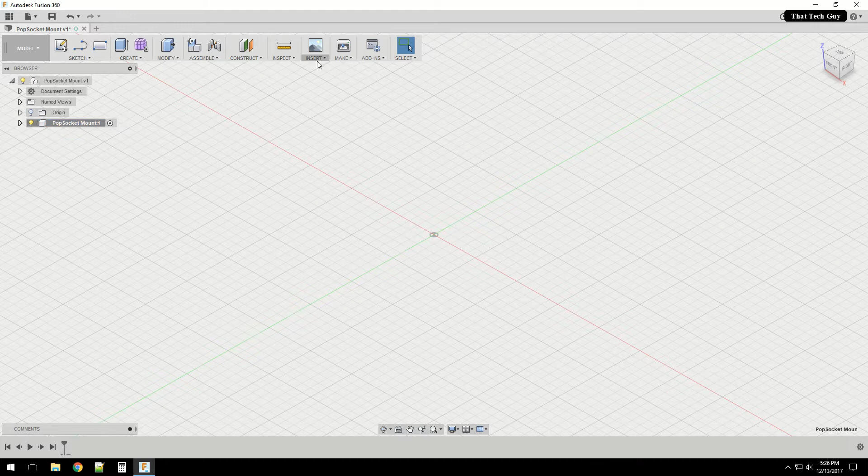All right, first thing we need to do is then set up a canvas, so we're going to attach canvas. This is that picture I took of the PopSocket. I'm going to create on this face, the front face. Click OK, we'll go take a look at it.

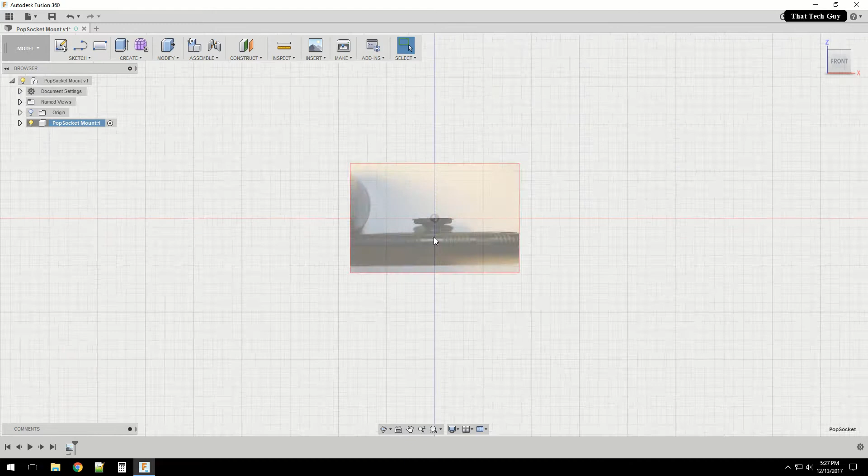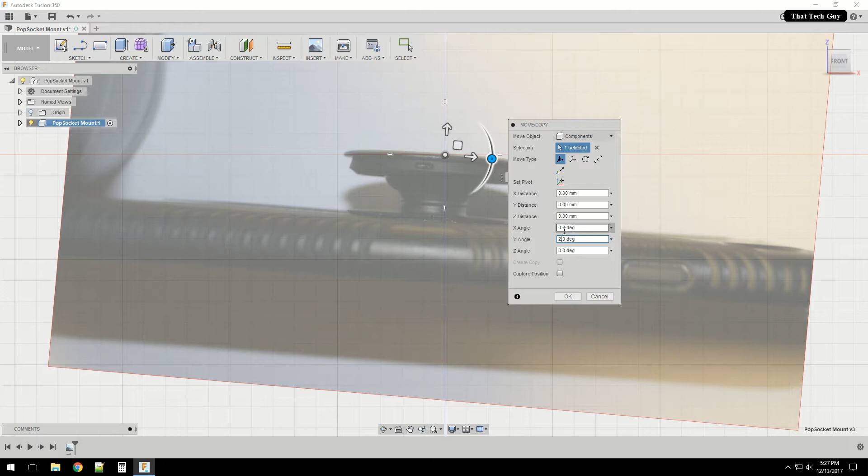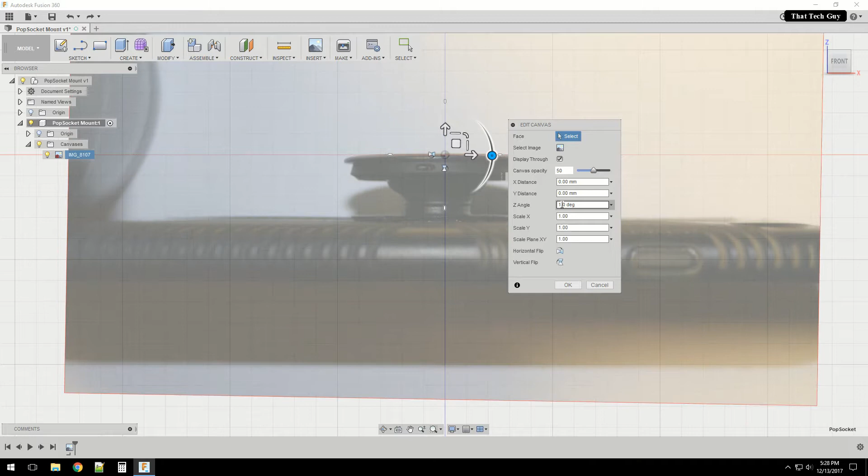First thing I'm going to do is fix the orientation. So let's go ahead and do that first. Let's just see, 5 is too much. Let's try 2. Nope. Let's try 1. That looks good.

And then we're going to calibrate the image so it's the same size as in real life. So I'm going to get my calipers and measure the very top portion from here to here, and I got 39.7.

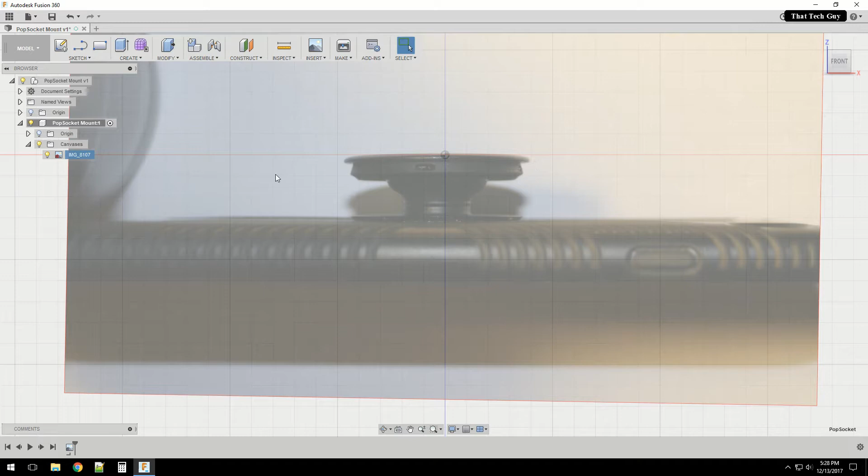What I'll do is right click on it, calibrate, we'll zoom in, from here to here is 39.7. And that basically made that 39.7 in this image.

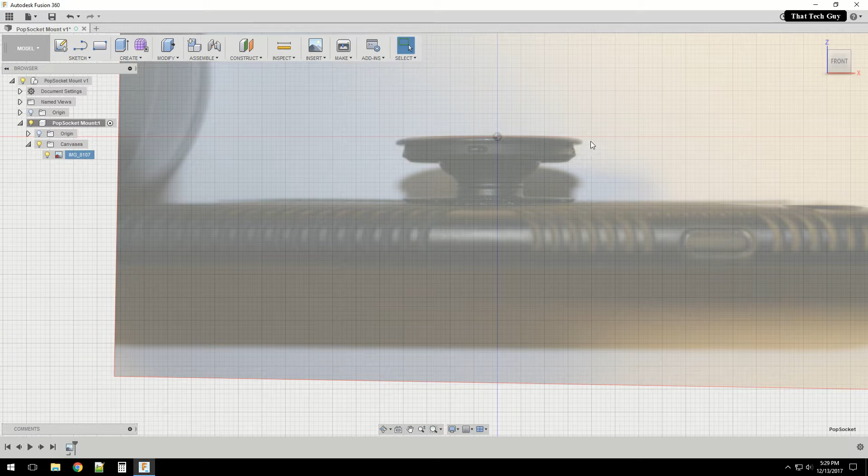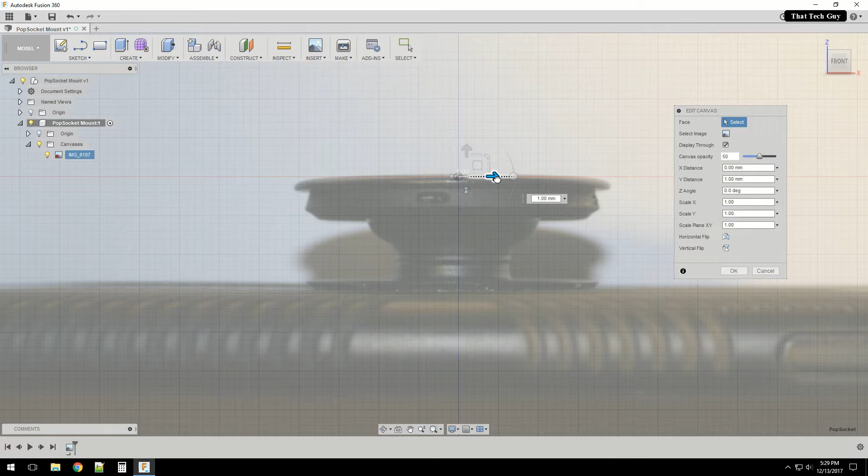So the next thing we're going to do is, now that I have things, it doesn't look perfectly centered, so I'm going to move it again. So I'm going to edit canvas. I'm going to move this out of the way. I think that looks good right there.

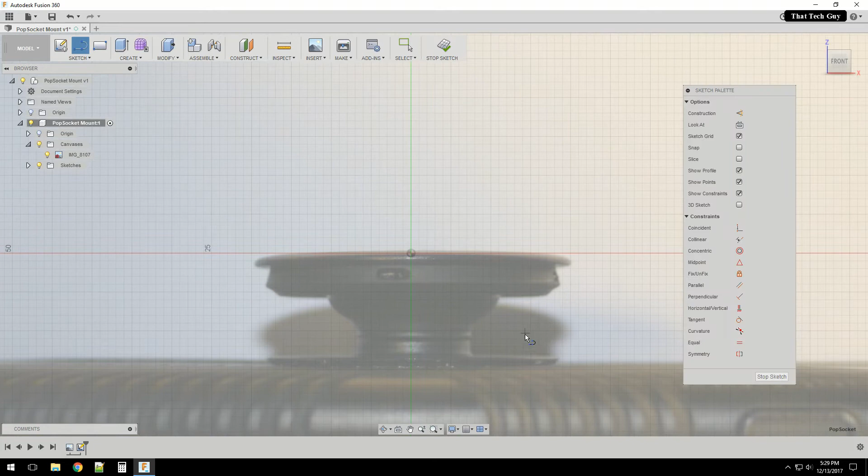So next is I'm going to start drawing a line. I'm going to start right over here on this view. It's asking me what view I needed to put it on, so I went ahead and clicked on that. Then I'm going to start here, here, and then to around here. I'm going to stop there.

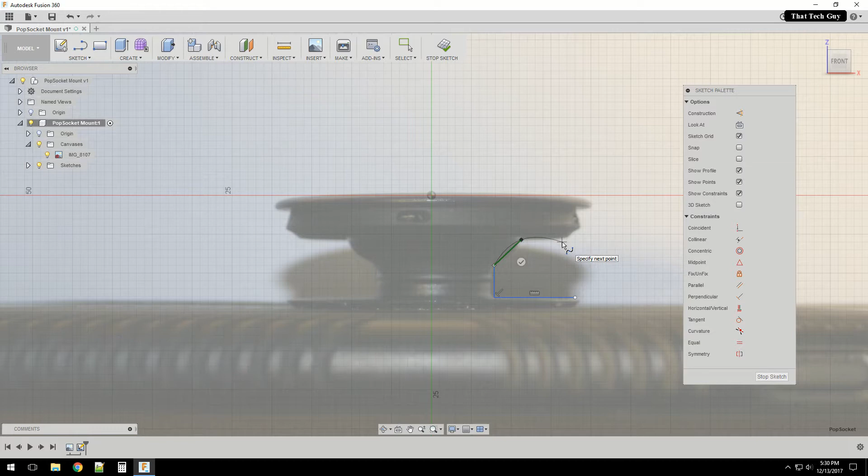What I'm going to do is get the spline tool to help me with this curve, so from here to here. And what I could do is, with these little handles, scroll in a little bit - Control Z, what I just did there. Okay, what I can do is hold these handles in, and I can better trace the curve there.

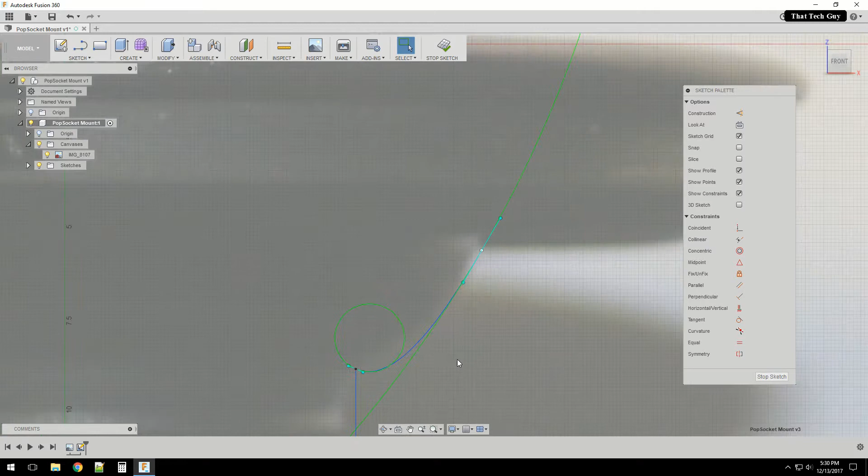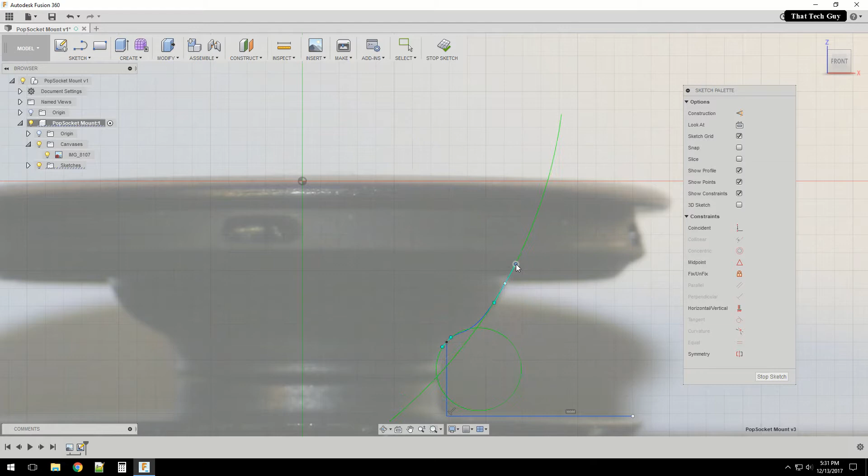This doesn't have to be precise. This actually kind of goes in like - oops, Control Z - actually kind of goes in like this. All right, that looks good.

And I can switch back to line. Then we just go 1 millimeter. Then I'm going to connect back to this one.

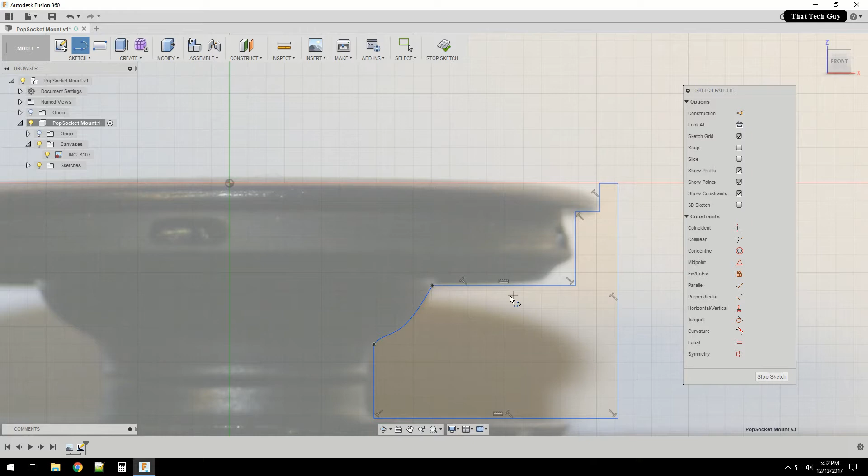Let me do that again so you guys can see. You see how when I clicked on that to start the line, but if I float over this, then it gives me basically like a snap to that point, and that's what I did there. And then I want to go ahead and click on that. All right, that looks good.

So the next thing, that's going to be what's going to hold it up.

So the next thing I want to do is stop this sketch, go to the top, and see what the diameter of this portion is down here. I just want to see what it is. I don't think it matters too much, but I think any circle will do. I'm going to sketch that out, create a new sketch on this plane, and create a circle with a center point.

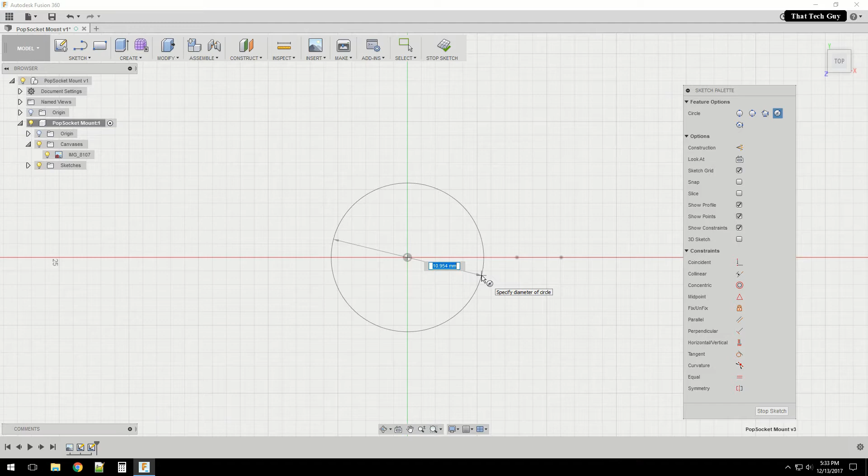Let me measure this. Looks like it's 14.6. So I don't think that really mattered too much, I think I could have gotten away with any circle. Basically, that's this space down here in real life.

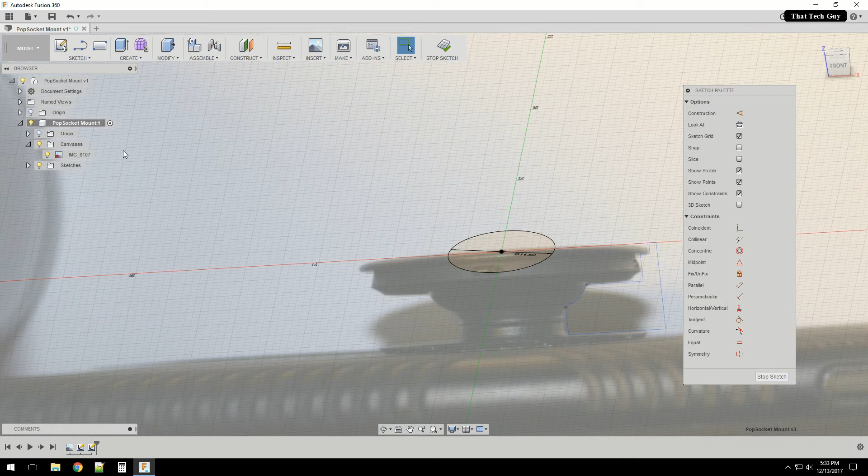So let's go ahead from next. What I'm going to do is sweep this profile by that circle. We're going to go to Create, Sweep. We're going to select that, and select this as the path, then click OK. As you can see, that will basically hold the PopSocket. Now we have to make an entryway on how the PopSocket can go in.

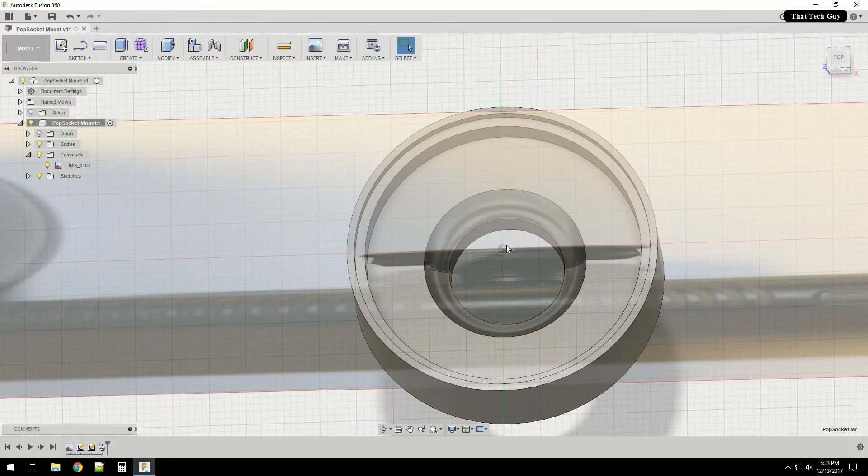So when I go to the top, what I think I'm going to do is create another sketch. We'll use this as the, we'll do 60 degrees. And then what I like to do is sketch from this point right here straight up at 90 degrees. There we go.

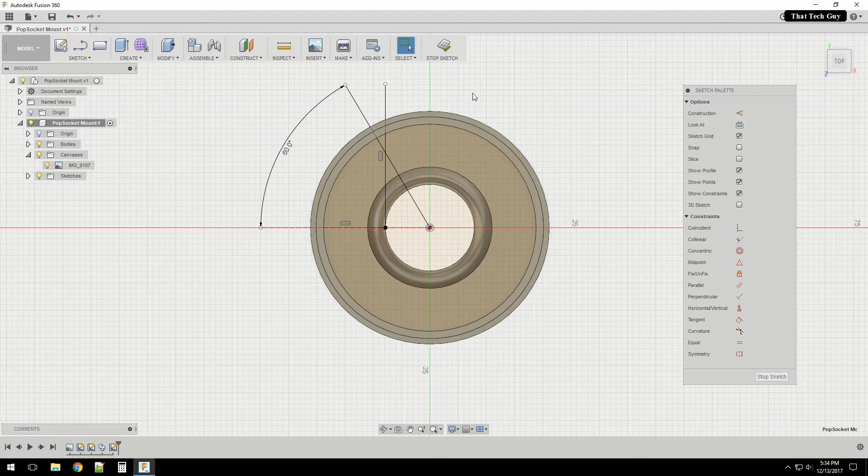And what I like to do is trim by hitting the T button, this right here. And then what we can do is mirror the sketch. So we're going to mirror. Well, before I mirror, I need something to mirror from, so I'm going to create another line. This is going to be a construction line here.

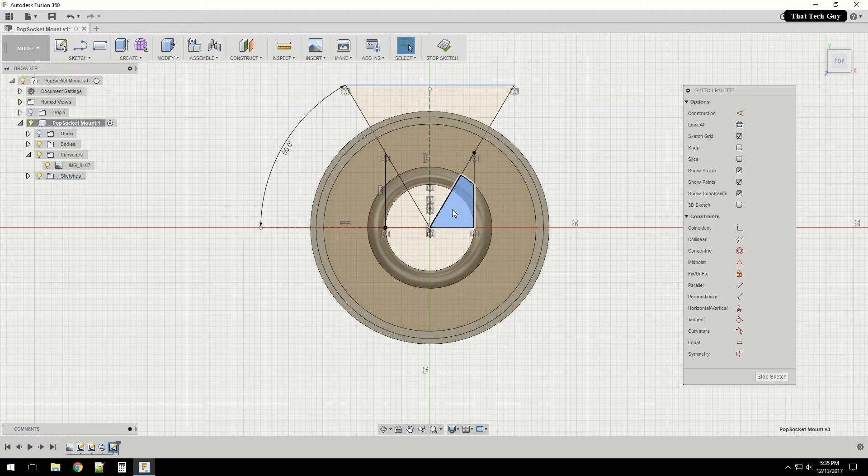So let's go ahead and once again do the mirror. I'm going to mirror this line against this line. That gives me a perfect mirror image of that. And then we're going to create one more line, mirror to here, and then one from here to here. Did I create this line? Oh, yeah, okay. So we're going to take these pieces right here.

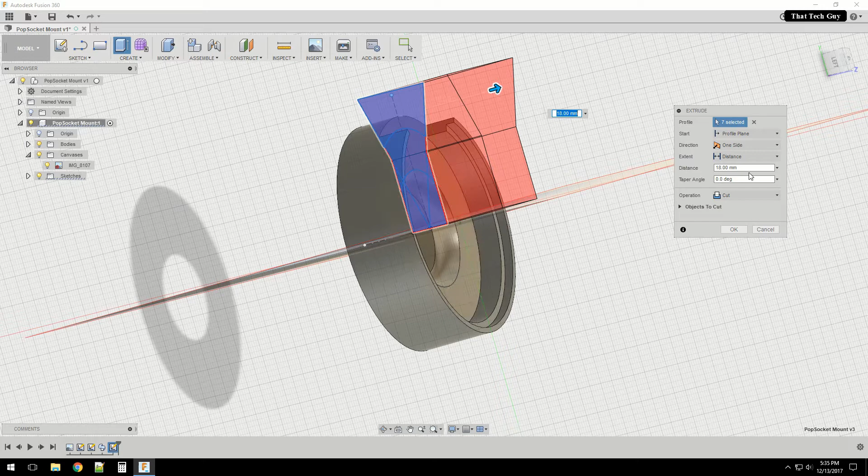What I'm going to do is go to a different view. See how it's kind of in the middle. I'm going to go ahead and extrude. The operation here is basically what the extrude is going to do - it's going to cut. So I'm using this to cut the mount. But instead of one side, I want to go symmetric so it goes both ways. Boom. All right, so now the pop socket should basically fit into that while it's popped up, and then when I push down on it, it should fit inside this cavity pretty snug.

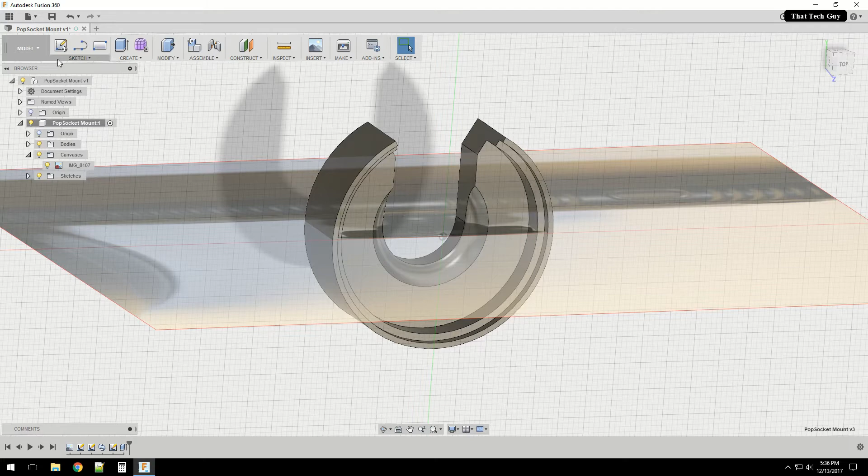All right, so let's create the base for it. I think I can disable the canvas now. I can turn off the canvas by these little light bulbs here.

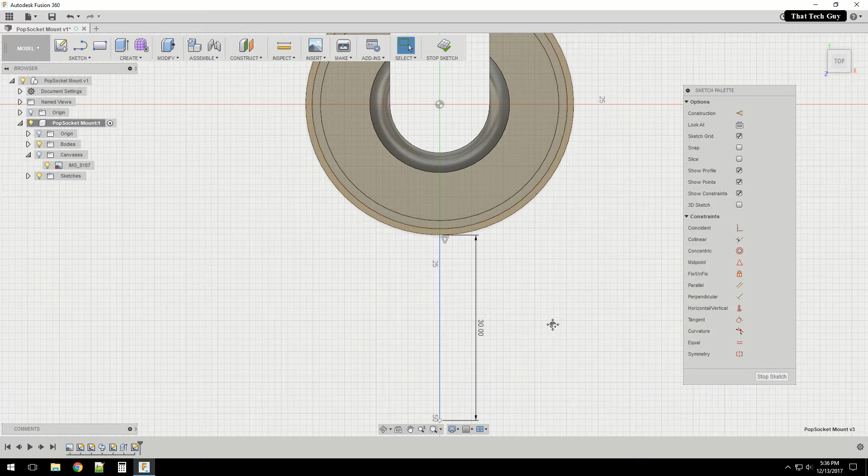Okay, so let's go ahead and create another sketch. This time we're going to use the circle here. And let's just draw, I think, let me look. Let's make the mount 30 millimeters that way. Now let's sketch a line about, no, let's just say 10 millimeters.

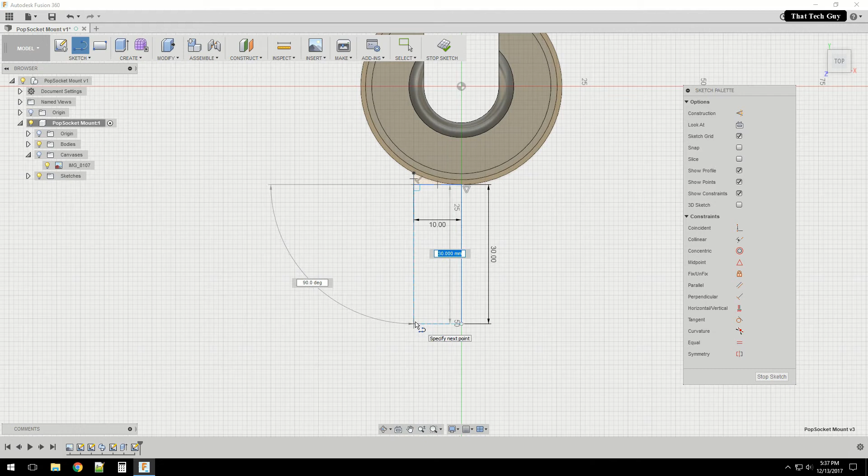And then what we could do is, boom. Then another line all the way down to here, and then here. And we can do the same thing, once again mirror, this line and this line, and use this as a reference line. Click OK. Since this line's a construction line, I will go ahead and make it a construction line. All right.

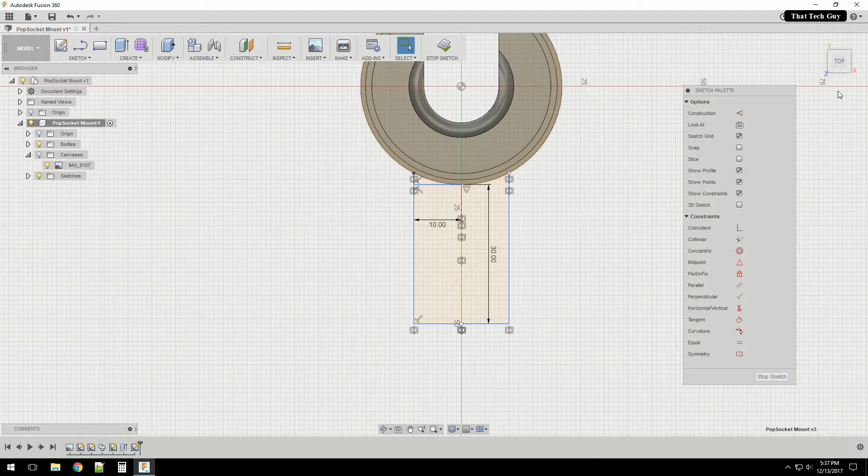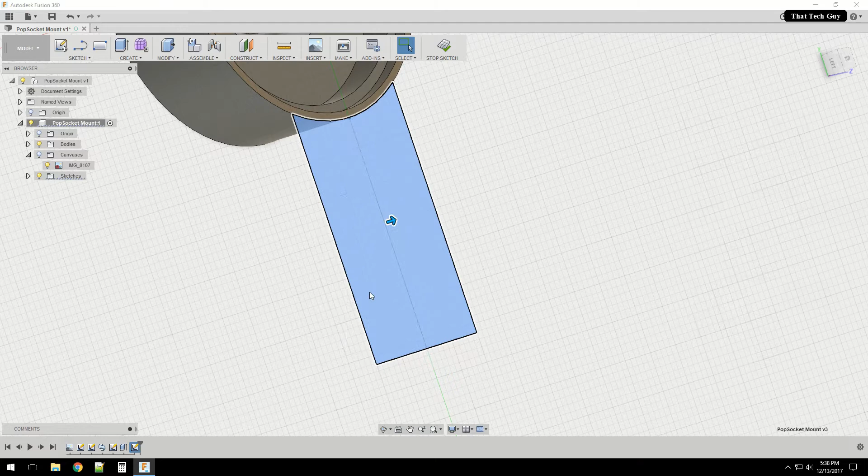So now what I want to do is extrude these faces. I probably should have deleted this line afterwards, so let's just delete that line. So there we go, makes it easier on us. So now let's extrude. What we can do is extrude all the way down. If you click on one of the faces down here, it'll basically extrude it to that point. All right, so here we go.

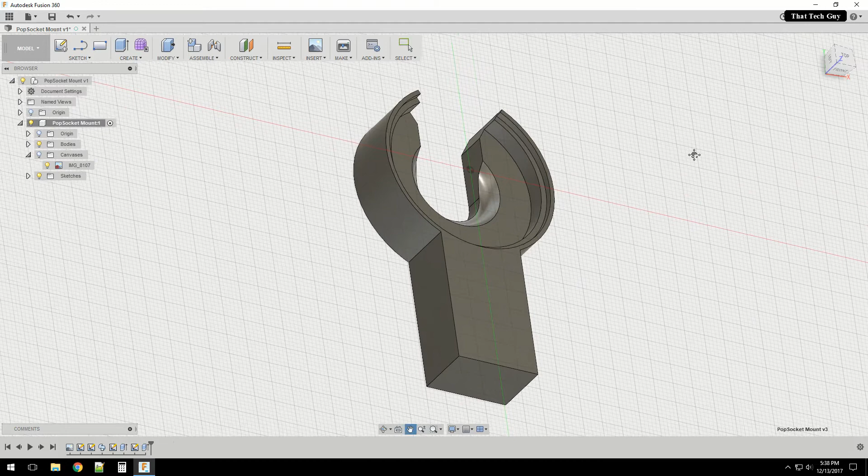All right, so I believe my mount is a 1/2 inch thread. So what I'm going to do is, I don't think this is going to be big enough for a 1/2 inch thread. Let's go to Google real quick - 1/2 inches to millimeter. Cool, there we had it, 12.7. So let's take a look.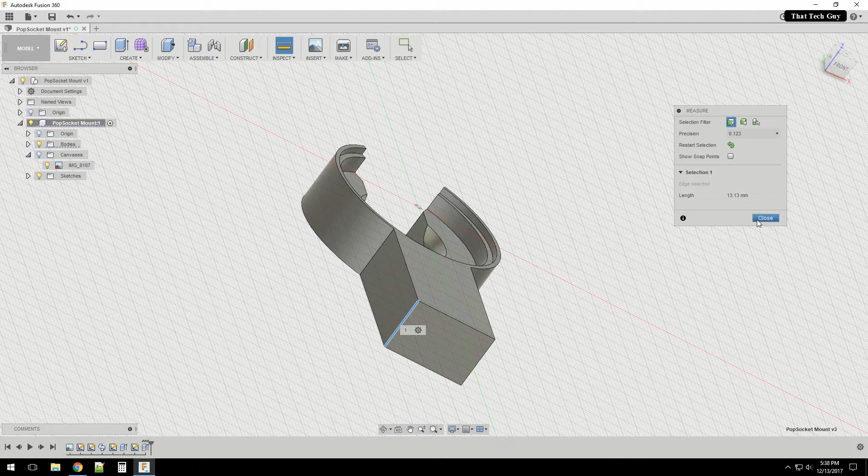Clicking on inspect and clicking on something will tell me how big that is. And this is 13.13. I don't think that's going to work very well. So let's go ahead and just make a box on this face right here. Let's just go 20 by 20. That looks good.

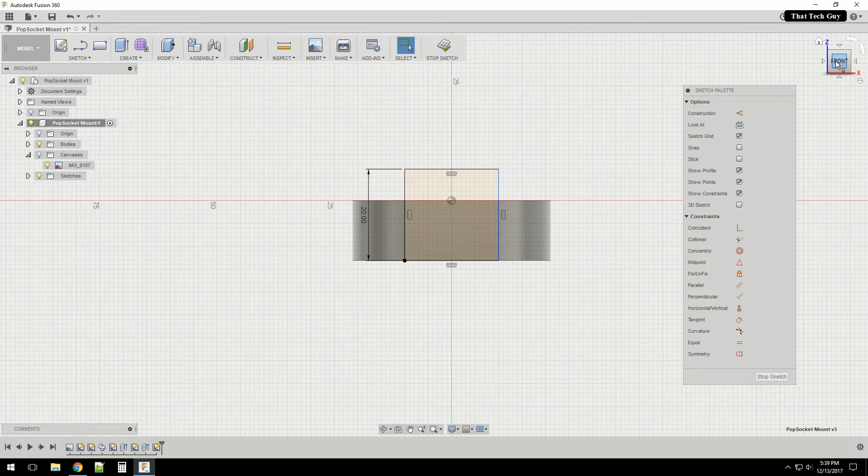Okay, and let's extrude just this portion out. Let's just say 10. Well, let's do 20.

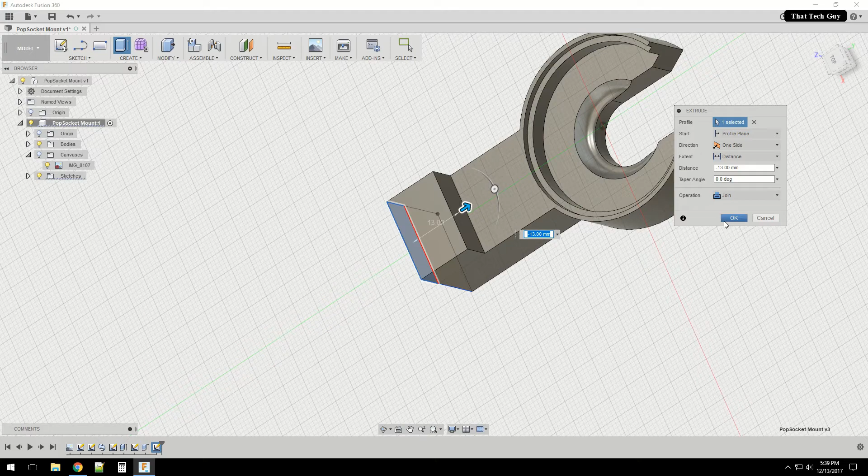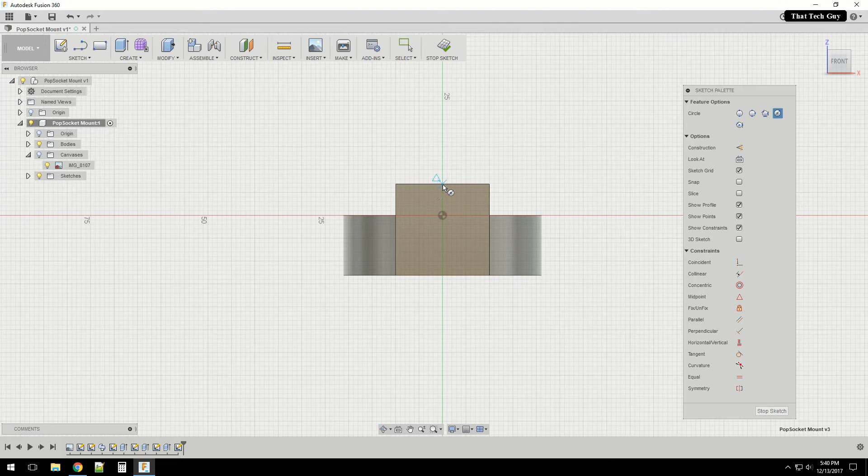Well, 13's fine, that should be fine. So what was that calculation again? 12.7. So we're going to create a hole, I'm going to create a circle, center circle on this. What I'm going to do is find the center there, find the center there, boom. 12.7, okay.

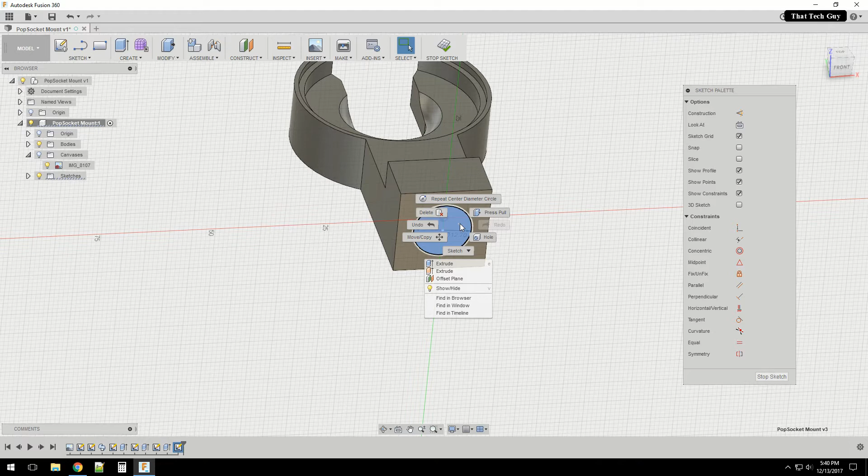Now let me check the mount. I believe it's like 6 millimeters. Yep, so we're going to extrude. Let's just go 8, see, it's on. It's fine, 7, 8, okay.

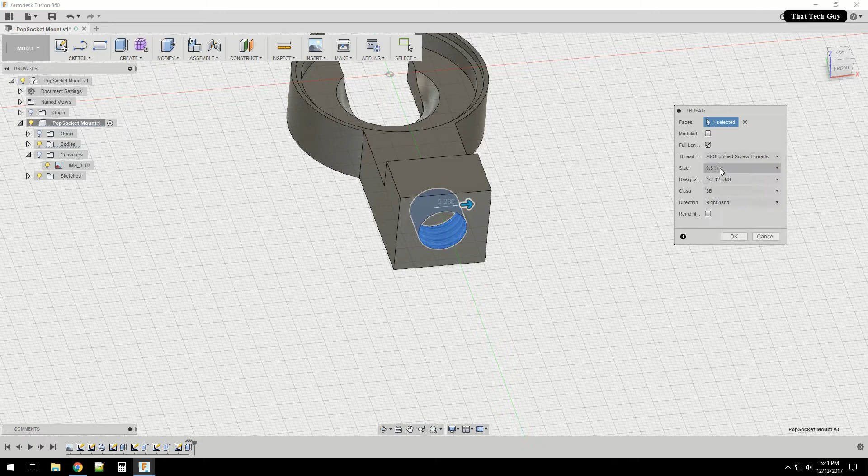So I just extruded that in. We're going to put some threads here. So what we can do is create threads, and I think these are ANSI 1/2 threads. You want to click on model, that'll model the threads onto it. And click OK.

All right, so here we go, so here's the part. It's finished, so now we're ready to 3D print. So let's go ahead and save. Always save.

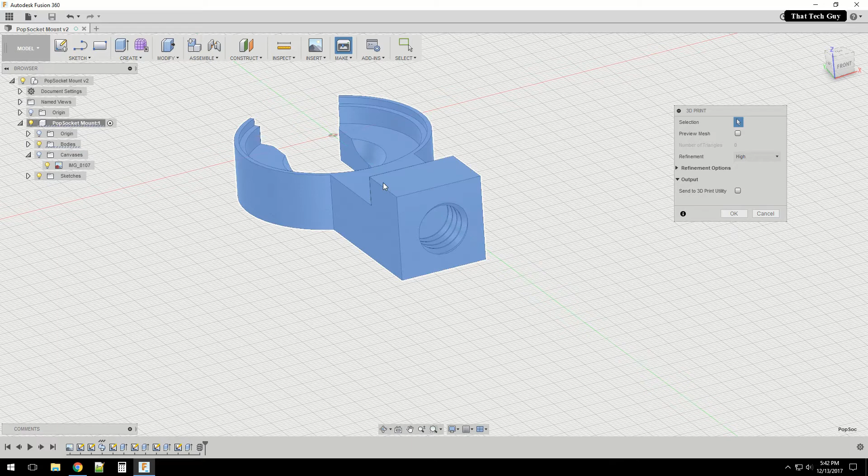And what we need to do next is File, 3D Print. And yeah, high's fine, I unchecked the Send to 3D Print Utility. I used the Prusa software, the slicer program, and this doesn't really work really well going directly to it. So I'm going to go ahead and click the part, and then click OK. It's going to ask me, hey, what do you want to save it to? So I'm going to save it to my desktop.

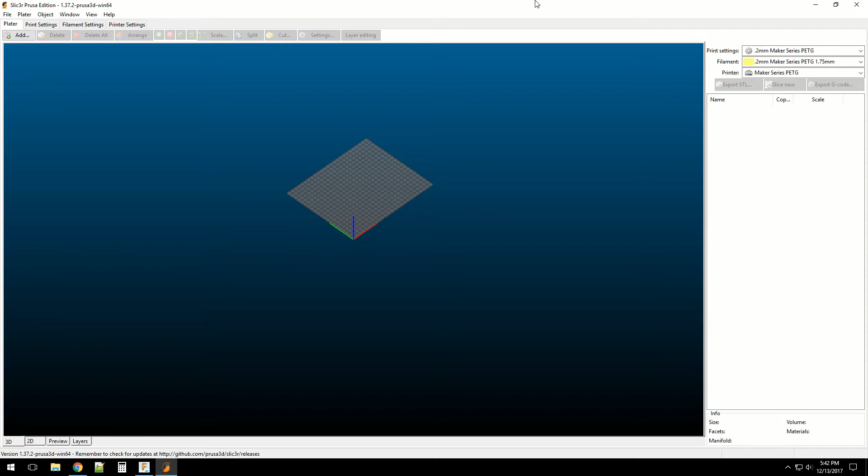And we'll call it socket mount. Okay, so let's go to Prusa real quick. All right, since see, I have it set to PETG, which is fine. I have PETG on the printer, so I don't really feel like changing it out. Drag it over, let's go ahead and take a slice of that, see how it prints out.

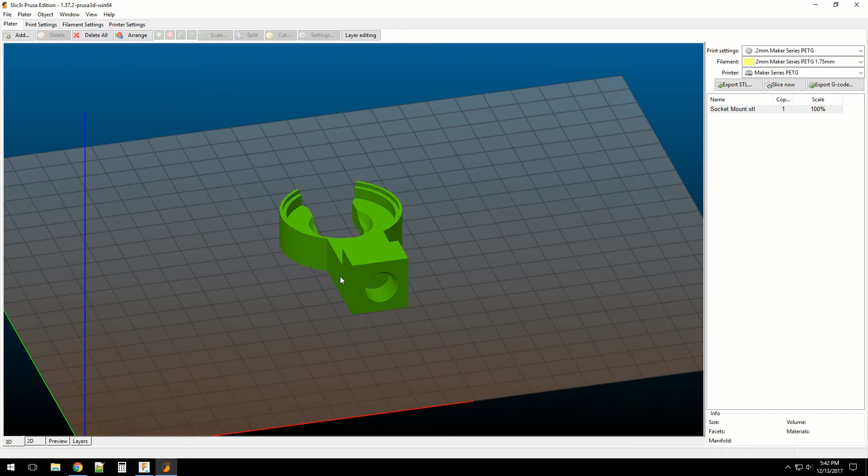Now if this was oriented any other way, I would want it to print this way. But if it was standing up, I would move it to this position. Although printing this upwards would probably work as well. I don't see any really major overhangs, but this probably would print best like this.

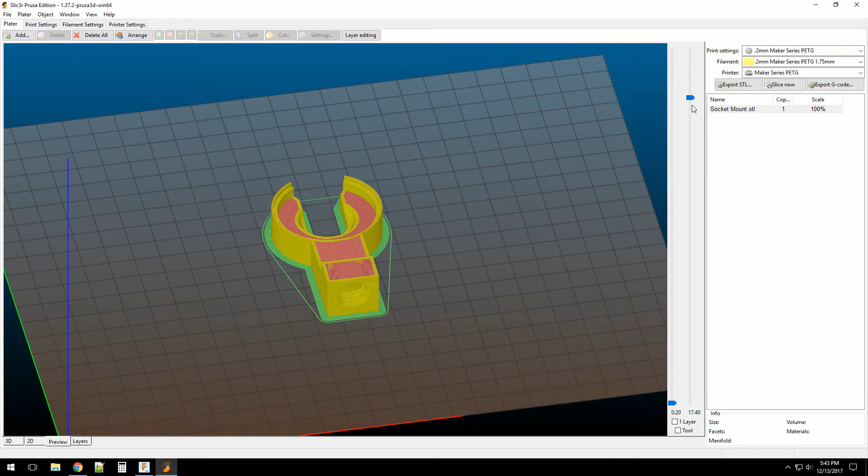All right, so we slice it, so we got to go to the preview, see what we have here. Everything looks okay, except I have a skirt, I don't think I need a skirt. So I'm going to take off the skirt, and I think I can use a little less infill. Infill, going to be, let's go to 10%. Layers, I'm going to go 4 for 4. And then skirts, we're going to 0 that out.

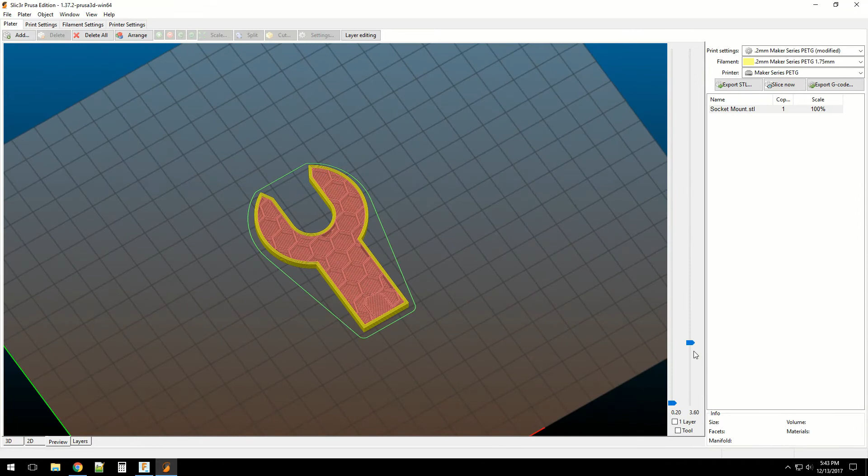Let's go back and slice again. All right, looks better. The reason I don't want to use a skirt on this one, it has plenty of surface area for it to stick on the bed. So that looks good.

So next we just got to export this, and it's going to make a G-code file, which we're going to copy onto an SD card and then go to the printer. So let me go ahead and do that.

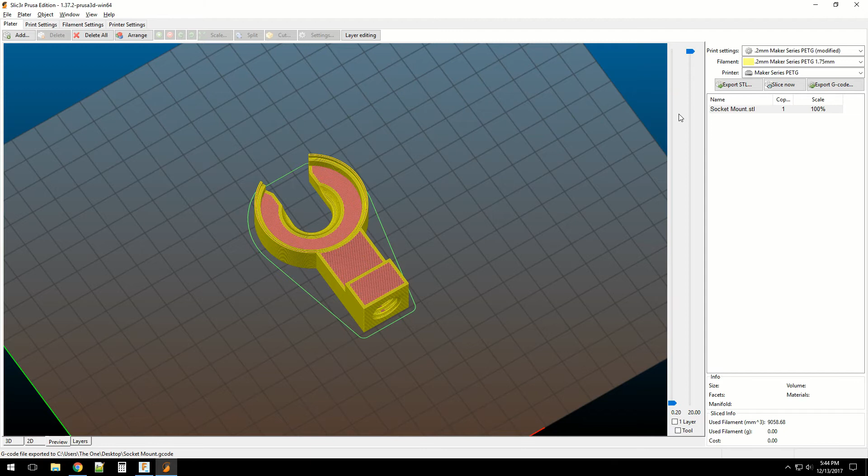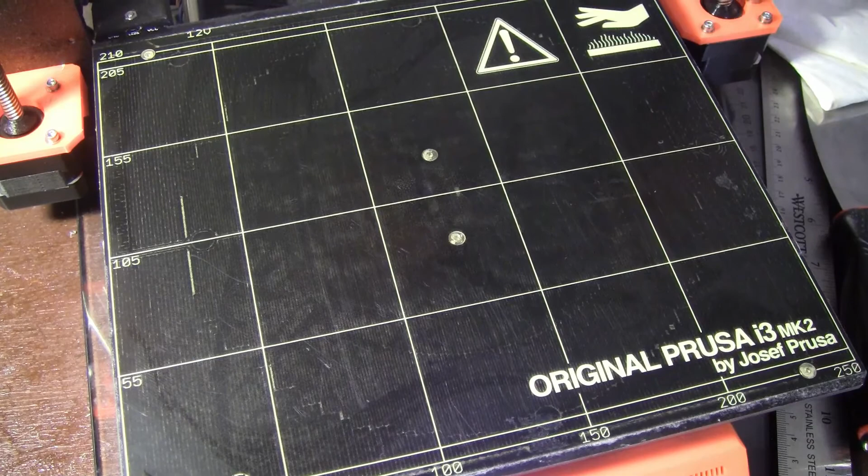Okay, since I'm going to be printing with PETG, I'm going to go ahead and clean the surface off. And I'm going to use some glue stick to help it stick. Actually, it doesn't help it stick, it actually works more of a release agent at the end. I think that's good enough, because if you don't use glue stick, PETG sticks to this type of bed way too well.

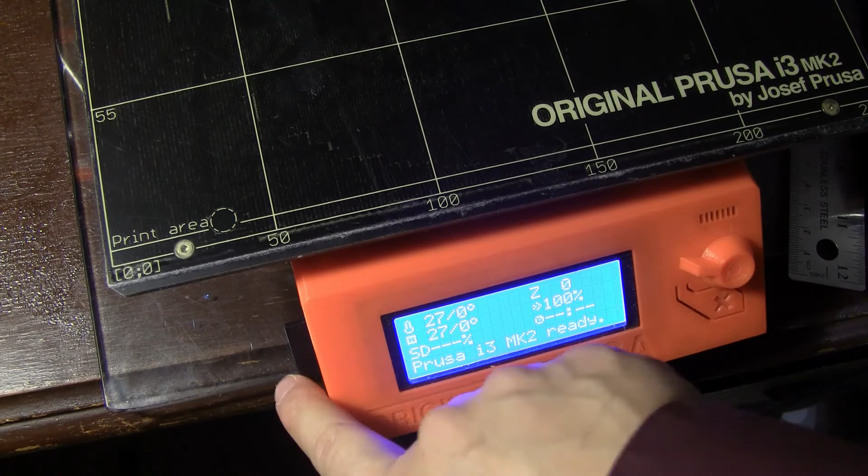Okay, so I've copied my G-code to the SD card, so we got to go find it. We're going to go print from SD, and there it is, first one. Click select, and it's just ready to roll. So now we just wait till it finishes printing.

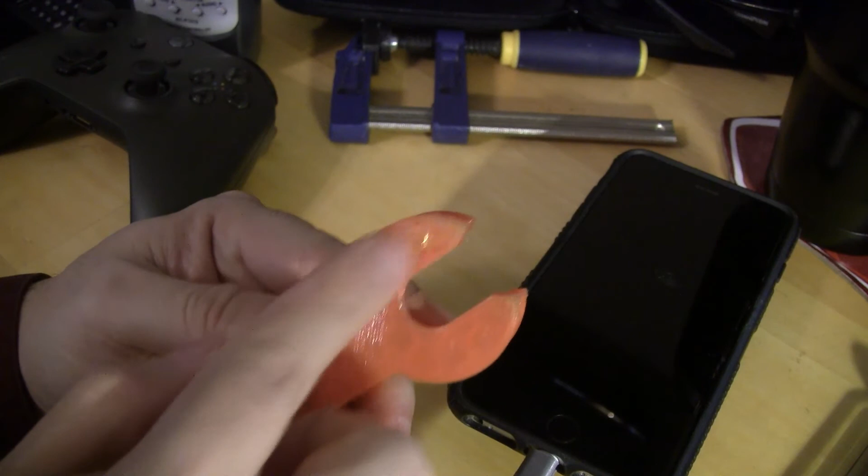Okay, we're back, here's the part as it came from the printer. It looked like I had a blocked nozzle or something going on with it because I noticed some of that black stuff in there, probably from another filament. Looks like it may have cleared itself out.

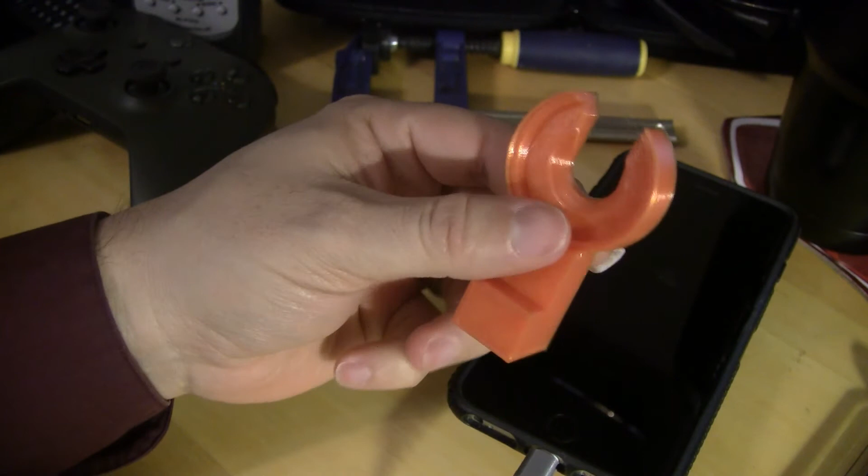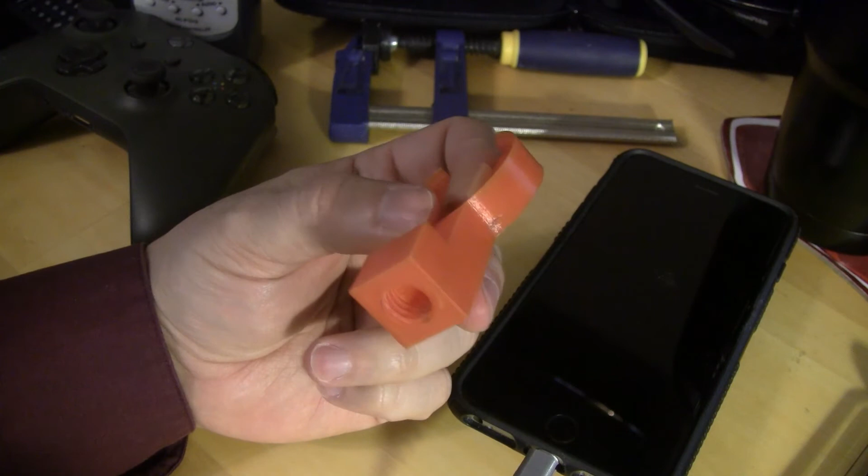So, but I made a mistake, like I always do, every first design has flaws, you'll have to find it. First of all, it's not 1/2 inch that I needed to do, it was 1/4 inch. So that hole was way too big for the threads on the tripod. But we can test to make sure everything else works. So here we are, let's make sure the pop socket's all the way out.

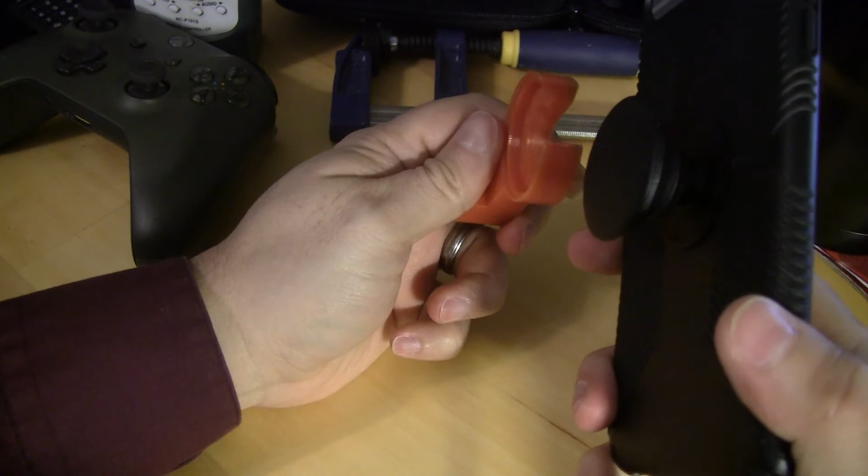And it looks like it worked with one exception. So I like it. It retains it really good, but obviously it rotates. So it looks like, at least for this phone case, I'm going to have to create a little part there or something to prevent it from rotating somehow. But other than that, pretty much a success as far as what I wanted to get with the mounting portion of it. So now I just got to figure out what to do about rotating it.

So why don't we go back into Fusion and fix that, and then try to figure something out about this. Obviously not a very good cam holder if it's gonna be like that. One thing I was thinking about was on my particular tripod, it's actually a pretty wide base. I was just thinking of making the base, moving this all the way up till the bottom part's flush with the phone. That way when it sits on the tripod, it'll automatically just set straight because of the tripod base. So I think that's what I'm going to do. I'm just going to make this flush with the phone, and then obviously change the hole. All right, so let's do that.

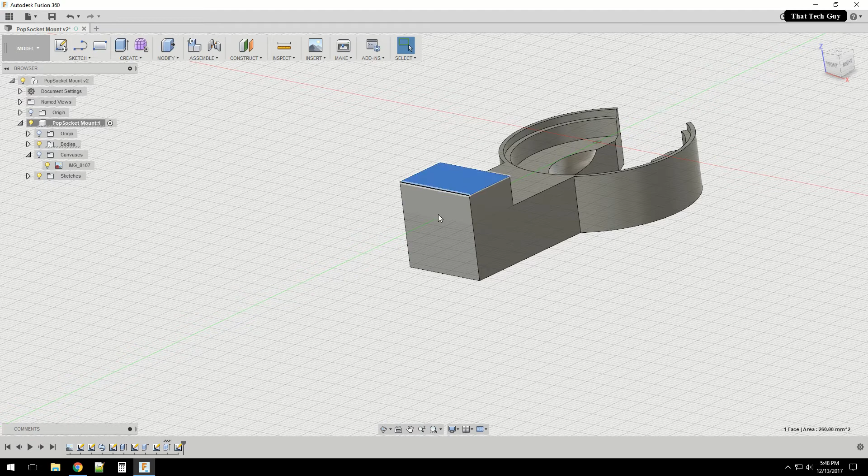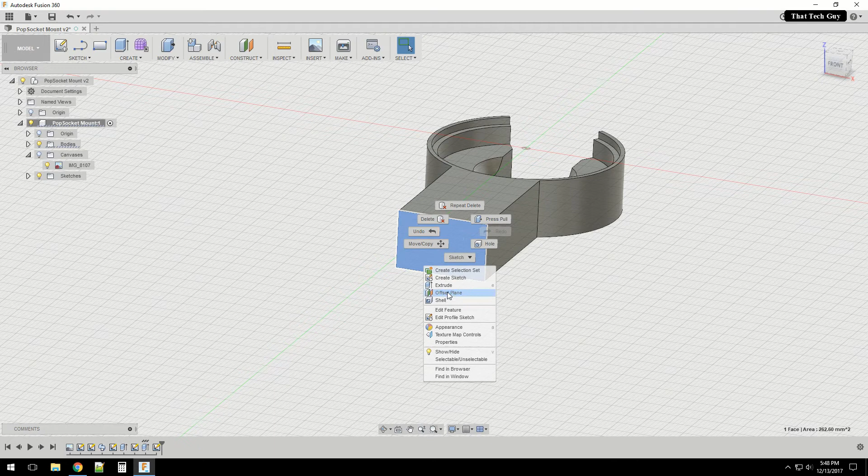Okay, we're back in Fusion. So let's go ahead and fix those two issues we had. So first things first, I'm just going to delete on the bottom here. This is where you can go back in time, by the way. So I'm going to delete the last two things I did because I don't think I need to go that high. So let's just delete that, and let's delete this. So we're back to this. All right, very good. So from looking at my phone and measuring out how much was hanging off, it just needed to basically go back 10 millimeters. So I'm going to extrude. I'm going to go back basically 10. All right. There we go.

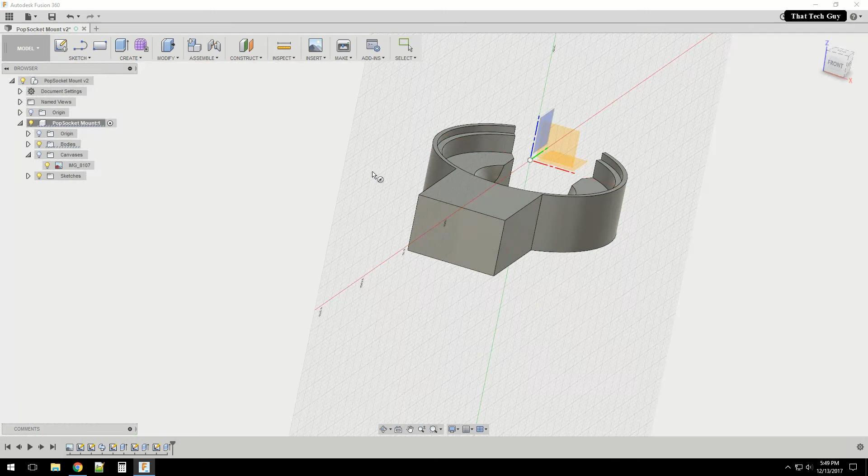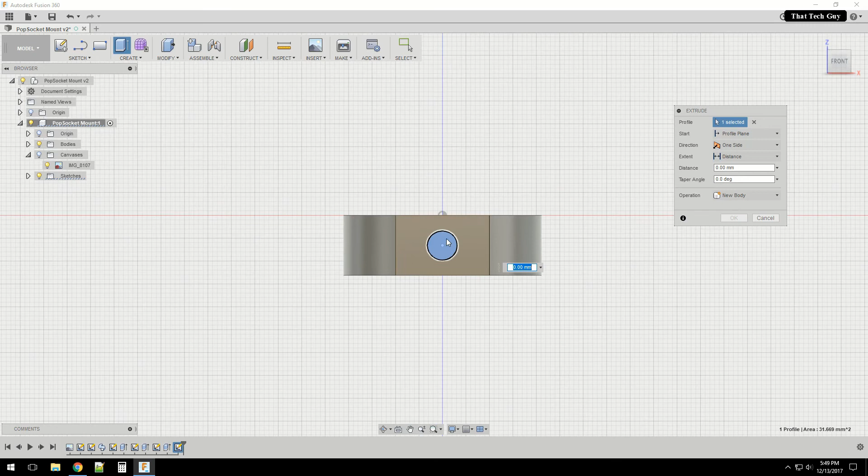Now that we have that like that, the amount I need is actually 1/4, not 1/2. That was my fault. So 6.35 is what we need as a hole. Okay, so we can go ahead and sketch, circle, center point. I think 6.35 will fit here fine. So we'll get it on that surface here. I'm going to find the center point there and the center point there. Boom. 6.35. All right. Then we're going to extrude. Oops. Anytime I extrude, I like to be in a perspective view, because in this view it's just sometimes hard to see which way you're going. So let's do it 8 again. All right.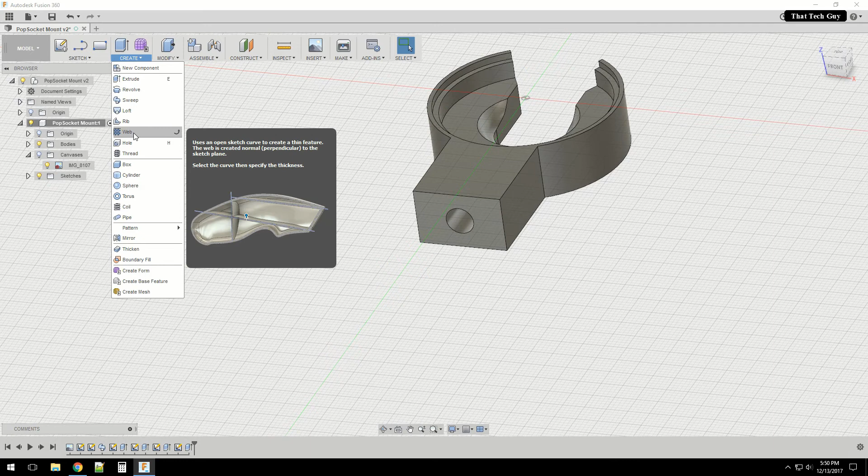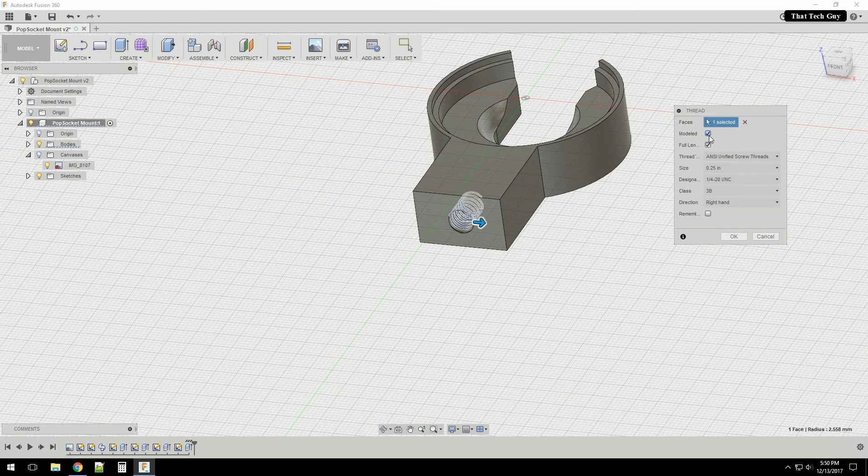Let's create some threads. Where are the threads? Oh, there they are. Make sure they're modeled. And I know it's the UNC style for the mounts here in the US anyways. So make sure you modeled them and click OK. So there, we have our two fixes. So hopefully this will work. So let's go ahead and save this again, and then let's go ahead and print this out. So 3D print the part, override this one, and save. All right, so I'm not going to go over the 3D printing portion again. It's basically the same thing, except we're going to print this one out.

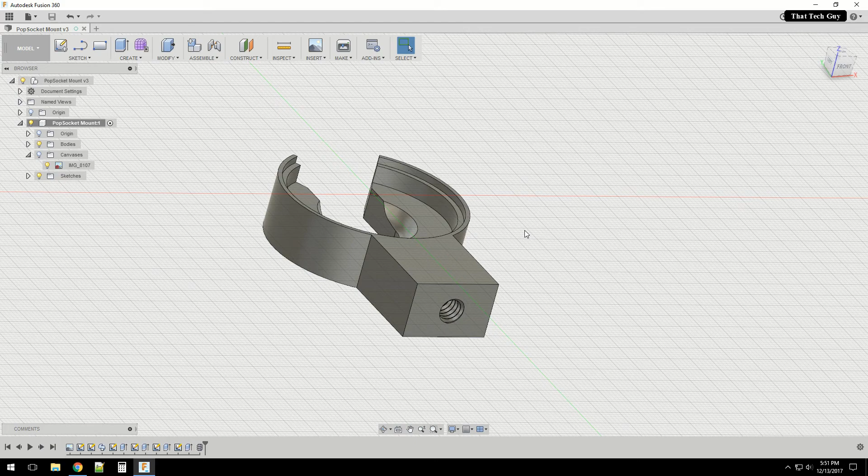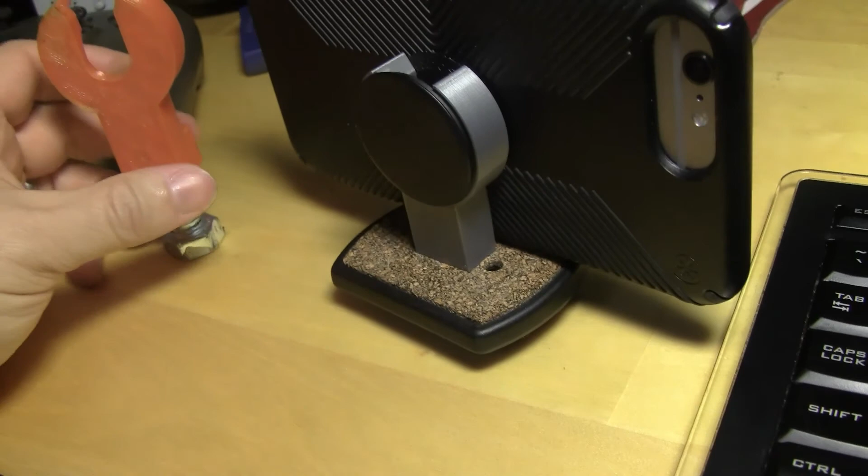Okay, here we are, finished with the print. I decided to change out the filament for this gray because I didn't want an orange one. So everything turned out perfect, very sturdy. As you can see what I meant by it basically self-leveling on the mount itself, and it's screwed in there on a 1/4. I did find a 1/4-inch bolt just to show you guys that yes, the threads do work. They actually work very, very well. A lot of people worry about plastic threads and metal screws, but to be honest with you, as long as you don't over tighten, you're not going to break it.